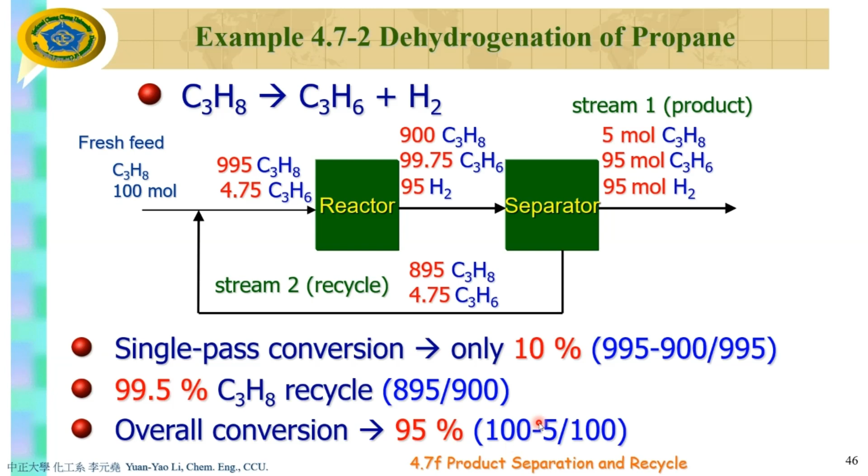About 99.5% recycles back to this reactor—the reactant recycles back. So for the overall conversion, which is 100 and this one is 95—100 minus 5, so overall conversion is about 95%. So it's good. This is one purpose for the recycle stream.

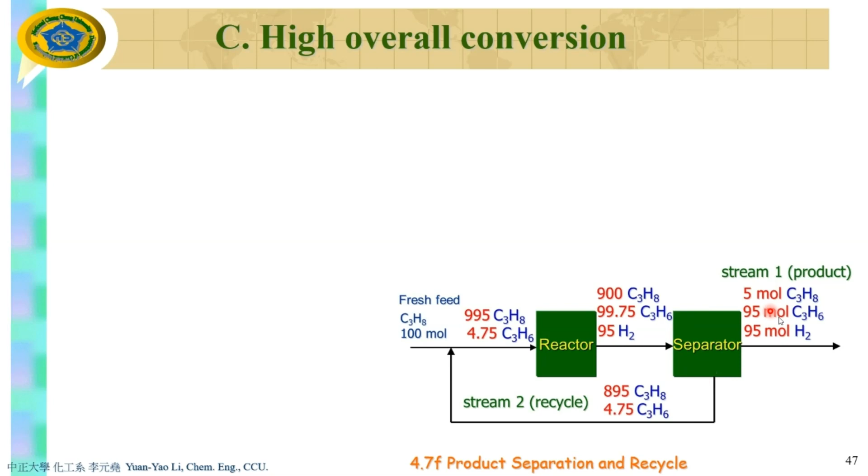So in order to have a high overall conversion, you have two methods. Method one is you have a very good reactor, so you don't need this separator. Method two is that if you don't have a good reactor, you need to have a separator in order to have a good overall conversion rate. This is very important.

We talked about that last week. Today we want to introduce another new topic, which is purging—we call it the purging stream. Let me make an example using the same setup as last week: this is a reactor, this is a separator, you have a fresh feed here, a recycle stream, a chemical reaction, and then you have a purging stream here.

You might wonder why, when things come out from the separator—this is the product stream, this is the recycle stream—we want one stream split out from the recycle stream, which is the purging stream. Why do we need to do that? This is the reason.

Assume you have a chemical reaction that reacts with oxygen. Once you have something react with oxygen, normally you don't put pure oxygen in—why? Because it costs money. So normally you put air in, because air has about 21% oxygen... it's free, so you just pump air into the reactor.

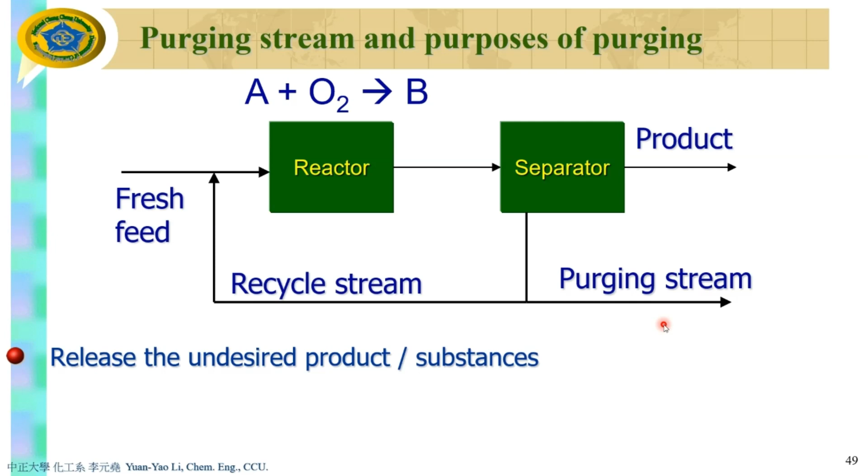This is the reason why we need a purging stream. It releases the undesired products or substances away from the system. If there is a non-reacted material in the process, purge is necessary. Otherwise, the material will accumulate in the process until shutdown. Shutdown means what? This reactor explodes, or separator explodes, from too much pressure, too much substance.

I will give you an example very soon. I just want you to know this is the purpose of purging.

So if you want to do mass balance using this system, if you have a stream from the separator and this kind of splitting point - split point means what, I hope you remember - the ratio of this substance will be the same, but different amount, of course. Or sometimes it can be the same amount. It depends.

The key is that the fraction of the substance in this stream will be the same fraction of the substance in this stream. So this is one point, split point, and this is the mixing point. As you remember last week, we introduced the mixing point to you here.

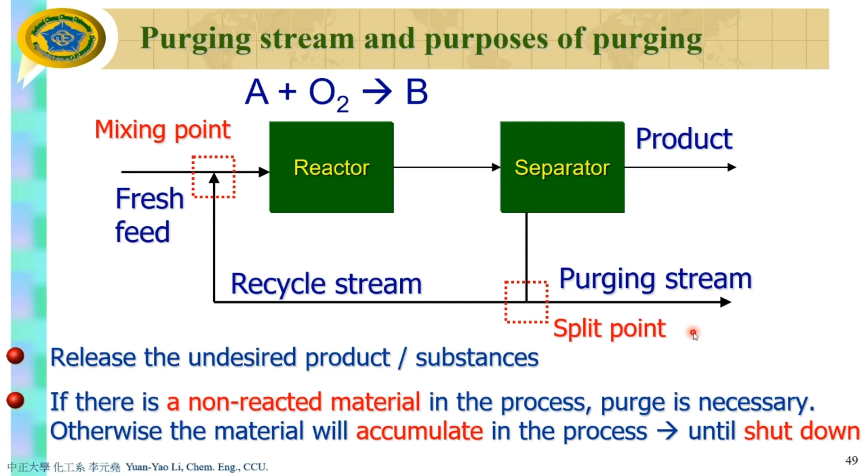Example figure 4.7-2 shows one reaction, where we want to make the product C2H4O from C2H4 plus oxygen. As you know, we don't really want to introduce pure oxygen into this reactor, we want to introduce air instead. So you have some portions, or sometimes we don't want this reaction to be so fast.

So we introduce some kind of inert gas, to dilute the concentration of oxygen. In that case, we don't have a very fast reaction. This is the purpose of the inert gas - in this case, it's nitrogen.

This is one example telling you that we need to introduce nitrogen into these reactors, and nitrogen doesn't do anything here - I should say it doesn't do anything with the reaction, but it does have the purpose of diluting the concentration of oxygen, or slowing down the chemical reaction, for example. So the nitrogen will go through the reactor without doing anything, and then it will go through a separator.

If the product doesn't need nitrogen - for example, this separator is a gas-liquid separator - all the gas will go through this way, and all the liquid will go through this way. In that case, nitrogen will go through this way. However, if you don't have a purging stream, the nitrogen will be stuck in a closed loop in this cycle, and you will have trouble. That's why you need a purging stream.

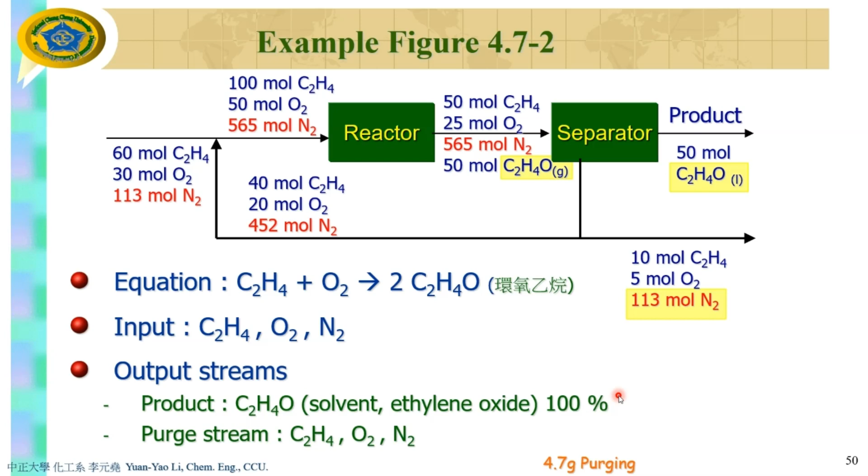And you have nitrogen here. So this is one of the examples.

Now let's go to page 133, example 4.7-3. This is an important example, and it is very likely this question will be in your final exam paper. So I want you to work with me so you can have a good score in your final exam.

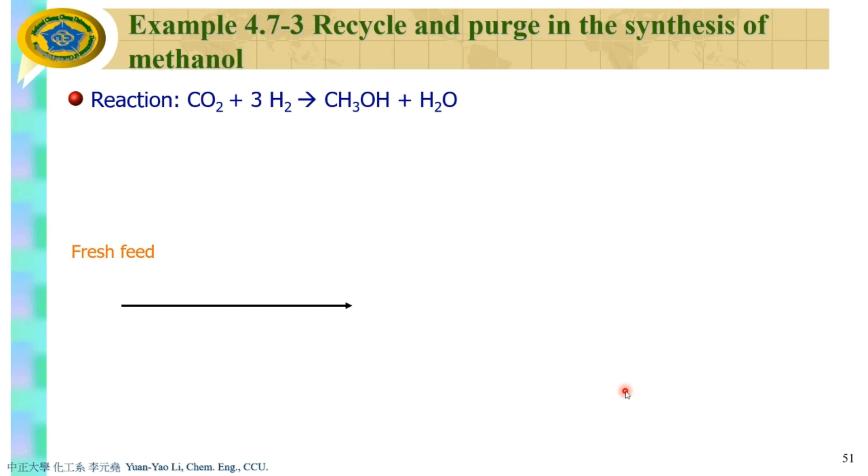Okay, so please work with me on the slide here. So we have fresh feed, and then what? And then we have hydrogen, carbon dioxide, and some inert gas, which is 0.004, right? 0.004. Okay, so this is what we know. And then this one going to the reactor. Okay, this one going to the reactor.

And then the reactor -- after the reactor, we have a separator, which is a condenser. So the condenser condenses something away, out in the liquid form. And some of them -- so which is, we have water and methanol. So these two will be condensed because water and methanol are easy to condense.

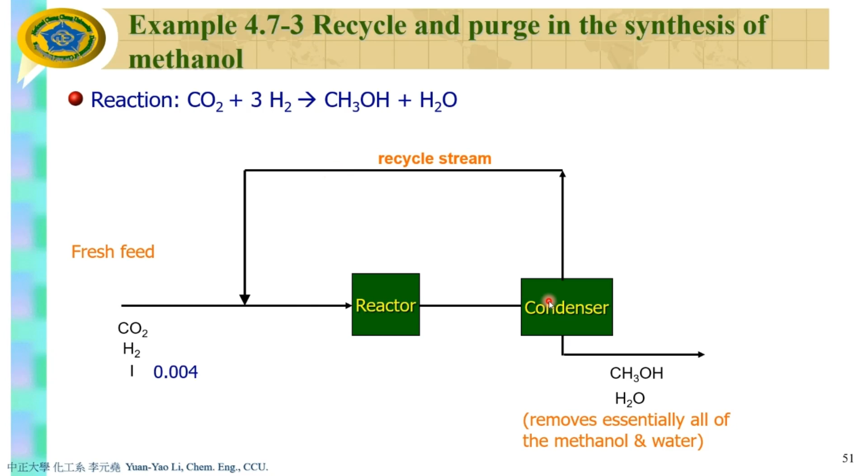And then you recycle the products, reactants, non-reactants back here. They are what? So this is called the recycle stream. And in order not to build up the reactants in the cycle, we have a purging stream, right? So this is a mixing point, and we will have CO2, H2, and inert gas, the same as CO2, H2, and inert gas. And then we have a purging stream.

I think in your final exam, I don't think I will give you this flow chart. So you need to draw the flow chart by yourself, I think, according to the description of the question. Okay, so basically the flow chart will be exactly the same. It's just that I will give you different numbers.

Right, so this is the split point. So you know that split point and the mixing point here. So again, if you come out with the carbon dioxide, hydrogen, and inert gas, of course in the recycle stream you will have carbon dioxide, hydrogen, inert gas, and in the purging stream, of course, you will have carbon dioxide, hydrogen, and inert gas, right?

Okay, so now it's important. Let's go to the text, the third paragraph. Start with the feed to the reactor. Okay, the feed to the reactor, not the fresh feed to the process. This stream on the slide -- this stream is the fresh feed to the process, but this stream is the feed to the reactor.

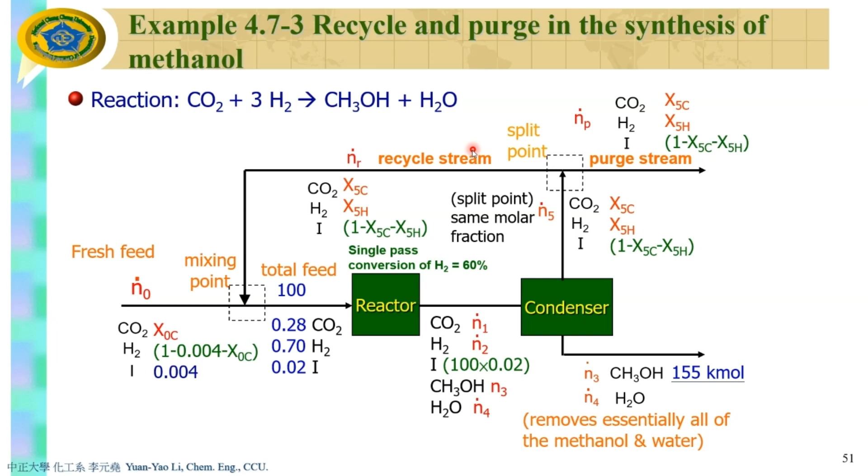Okay, so this is, so we complete all the unknowns in the flow chart. Okay, so now let's start to work from the basis, and then DOF, and then do the calculation. So in page 139, as a general rule, a combined feed to the reactors is a convenient stream to use as a basis of calculation for recycle problems. So remember this key point, okay? So when the stream composition is known, we will therefore temporarily ignore the specified methanol production rate, which is 155 kmol per hour, okay? Balance the flow chart for the assumed basis, which is what? 100 kilomoles per hour, okay, and then scale. This is important, after that you do the scaling. Scale the process to the required extent. Right, so let's do it.

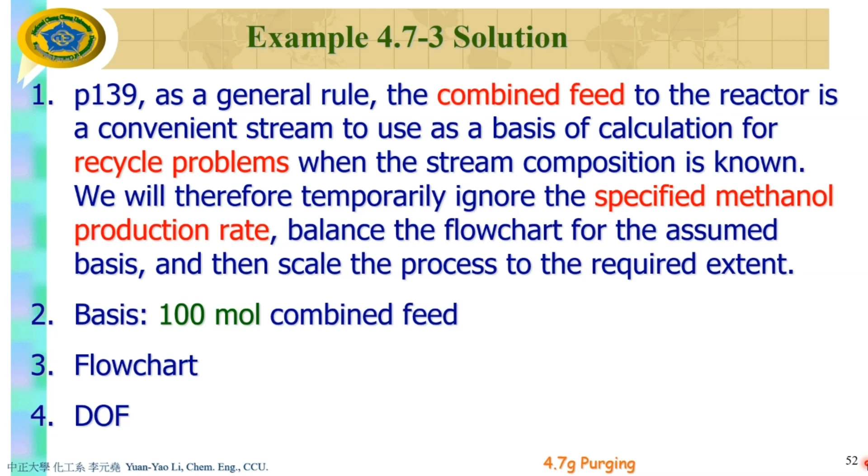Second, basis 100 kilomoles, or you can say 100 moles as you like. Combined feed. Third, flow chart. Okay, you finish the flow chart, and fourth, you do the DOF. Okay, so how can we do the DOF?

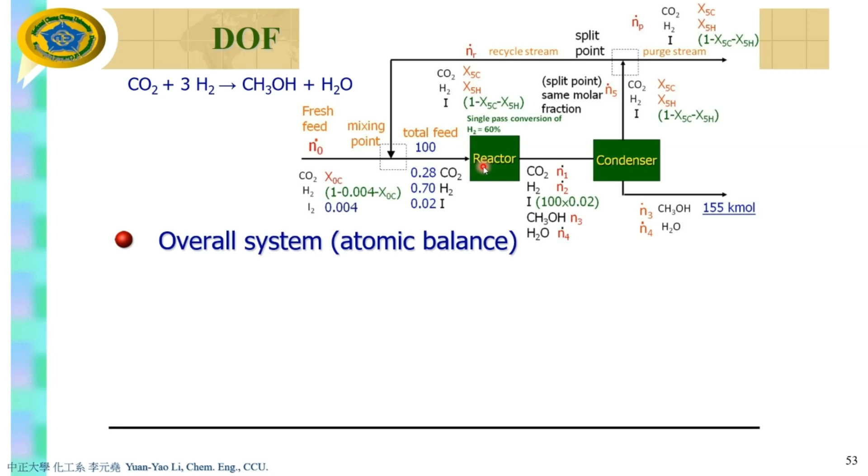First is overall system, overall unit system, right? So overall unit system, if we do the overall unit system here, then we need to conduct with what? We need to conduct with atomic balances. Why? Because the overall unit system involves chemical reaction. So as we know from last week, we suggest you use atomic balances, which is easier for you to do the calculation. But before you do this, let's do the DOF. So there are four terms in the DOF for the atomic balances. The first term is what? Unknown, right?

The second term, I hope you remember, independent atomic species balance. How many atomic species are involved in this reaction? The third one is molecular balances on independent non-reactive species. So if this system involves inert gas, you need to do the molecular species balance, especially for the inert gas. Okay, and then fourth, other equations relating unknown variables. Okay, like remember that, like single pass conversion specification, physical laws, and physical constraints.

Okay, so let's do it in the overall system. Please tell me how many inputs and how many outputs in the overall system. Anybody want to tell me? I want to give you 0.5 point. One input, two outputs, right? Okay, thank you, I'm happy somebody raised their hand so fast.

So this is a little bit more, right? We have one input, two outputs, okay, so I'm sure you know that. How many unknowns here? I'm sorry, you already know the answer, so I don't want to give you points. If you block here, one input, two outputs, so you need to start to count how many unknowns. 1, 2, 3, 4, 5, 6, 7. There are 7 unknowns.

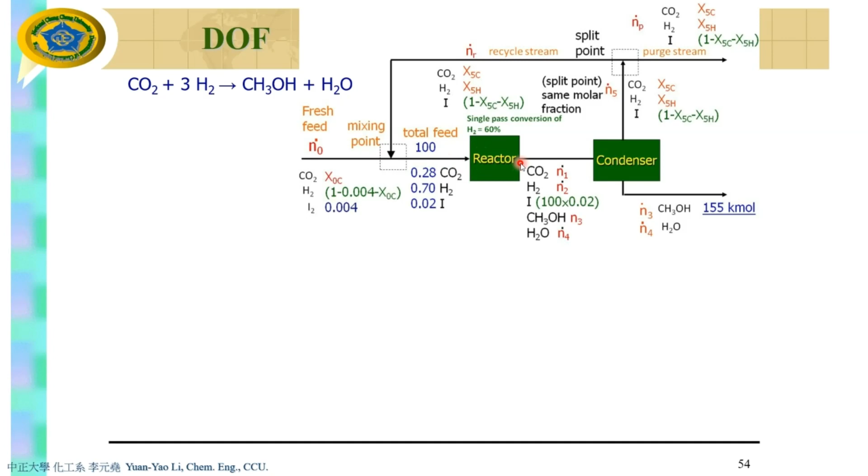So then where is the specification? This is the specification between the input and output. So if I were you, I would choose this reactor first because it has less unknowns and more specifications.

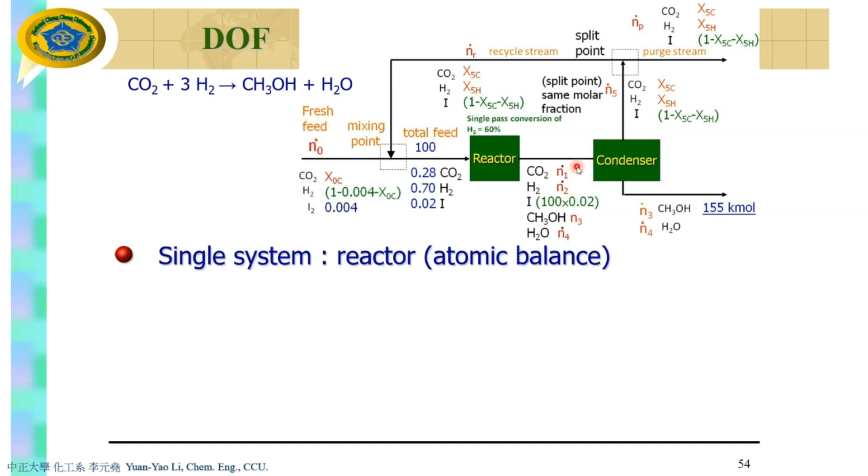And again, we need to do atomic species balance. So again, let's write it down here. So you have one input and one output, easier. So how many unknowns here? 1, 2, 3, 4. We have 4 unknowns.

And then how many independent atomic species balances? Again, carbon, oxygen, and hydrogen, right? So we have 3.

And do we have molecular species balance? 1, right? But no, actually I use a bracket here because you already used these unknowns, there's no unknown. You don't make a red mark here because you already use this specification. Sorry, you already used these balances already. So ignore this one.

Okay, and then what's the other equation relating unknown variables? 1, right, which is the single pass conversion. And you need to remember the definition of the single pass conversion. Okay, so 4 minus 3 minus 1 equal to 0, so that will be 0. So you can achieve this one, this one, this one, and this one, N1 to N4.

Again, I don't want to waste your time doing this kind of easy calculation, you do it by yourself. Okay, so because we use the single pass conversion for the mass balance, I'm sorry, let me restart. We use the reactor for this mass balance, so we get N1, N2, N3, N4, right?

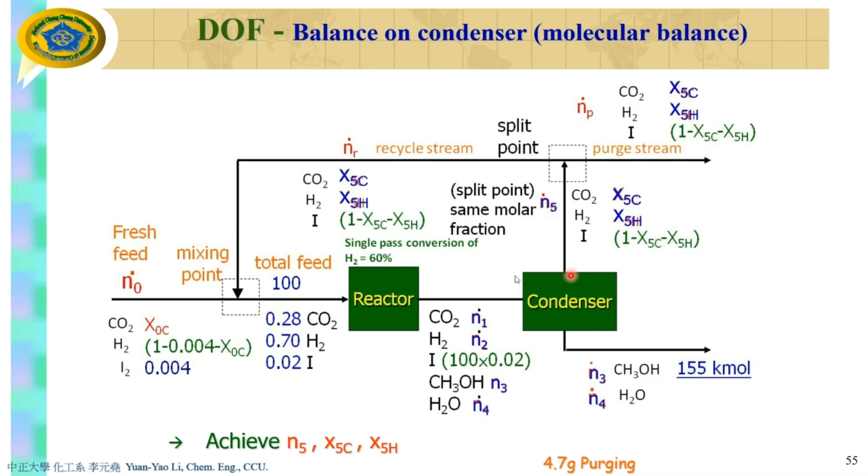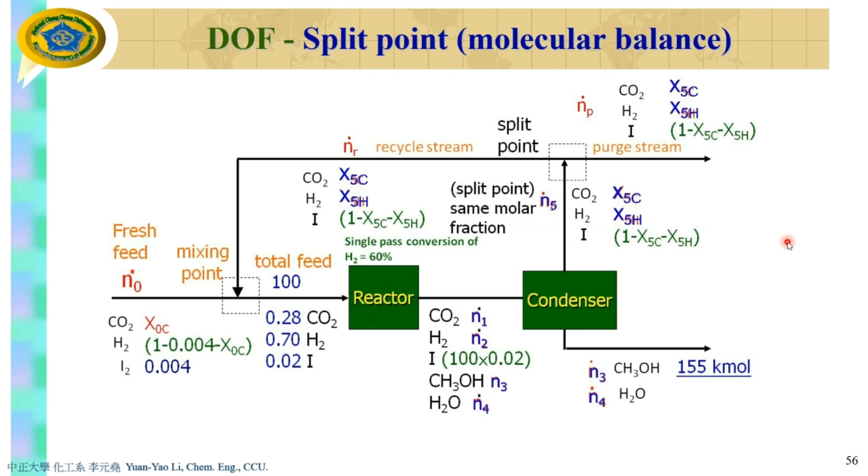So you have to go back to this one. Once you do the balance on a condenser, you solve the problem and get some answers. After that, you move back to this, to the splitting point, molecular balances. And ratio of species is the same, so it's not independent. So forget about this point and move to the mixing point.

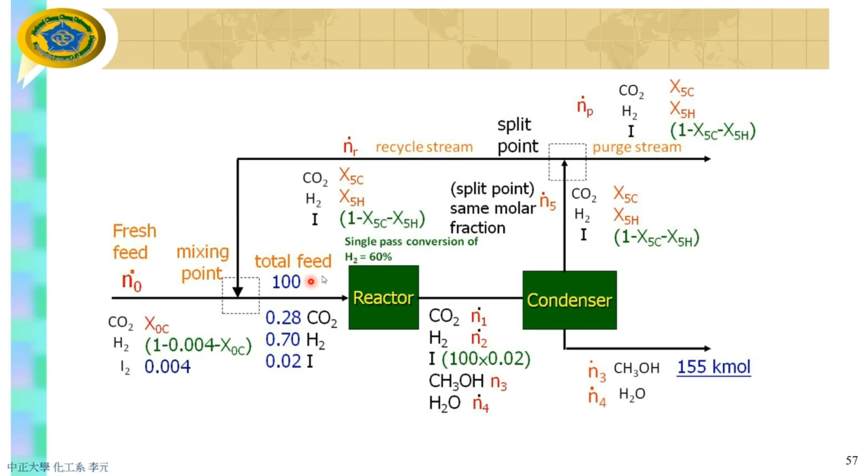Okay, so let's revise this again. Once we get the mass balance for the reactor, we get N1 to N4, right? We got N1 to N4. And because this is a condenser, so since condensed will be 100%, N3 will be the same, N4 will be the same here. And then after that, we do the condenser, we got an answer of N5, X5C, X5H.

And because this is a splitting point, the fraction will be the same, right? For the purging stream and recycle stream. So X5C and X5H will be the same according to this stream. And this one is not independent, N sub R and N sub P is not independent.

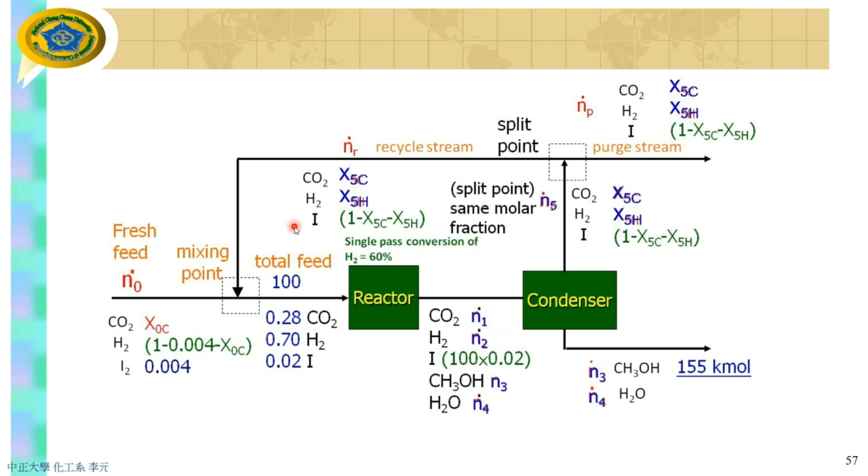So let's move to the mixing point. So mixing point, how many input? 2 input, 1 output, right? How many unknowns here? 1, 2, 3. There are 3 unknowns. So 3 unknowns, easy, right? So you can get 3 unknowns from 3 molecular species balances: carbon dioxide, hydrogen, and inert gas. Bingo, you can solve this problem.

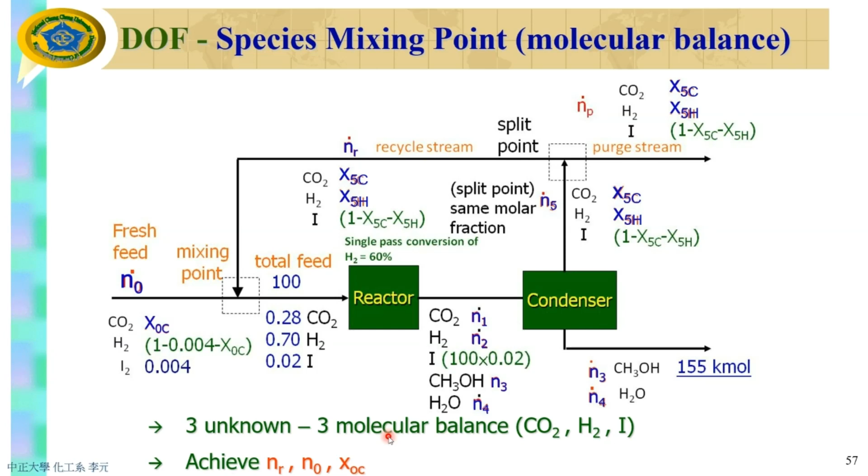NR, N0, and XOC. Okay, so with this way of doing the job, I hope I worked through this with you, and I hope you understand. In your final exam, you can do this calculation easier. Right, and then back to the splitting point, you finally get this number.

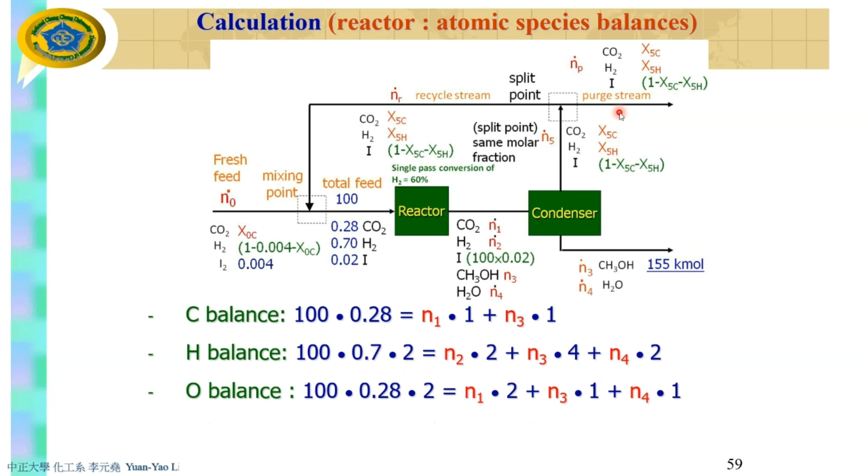So now this is the way of doing the calculation, and I think please read this by yourself. You can practice this. Okay? And you can get the answers.

Right, so the final part is called flow chart scaling. As I just told you, we forget about 155 first and we have a basis in this stream. So once we get N3, there's a ratio of N3 to the 155, so you can scale up or scale down. That's what we learned before the midterm exam, right? So if you know the ratio, you can change.

If this ratio is about 10 times, so it's just times 10 for N4, N1, N3, and then N5 here. Of course, you don't change the ratio here, okay? You just scale up or scale down.

So basis is 100 kilomoles combined, okay? And we got N3 is what? N3 is 14 kilomole. And then the text tells us that N3 is 155. So you just divide 155 by 14, that will be 11.1. So that means you have to multiply all the numbers by 11.1 from the original number. Okay?

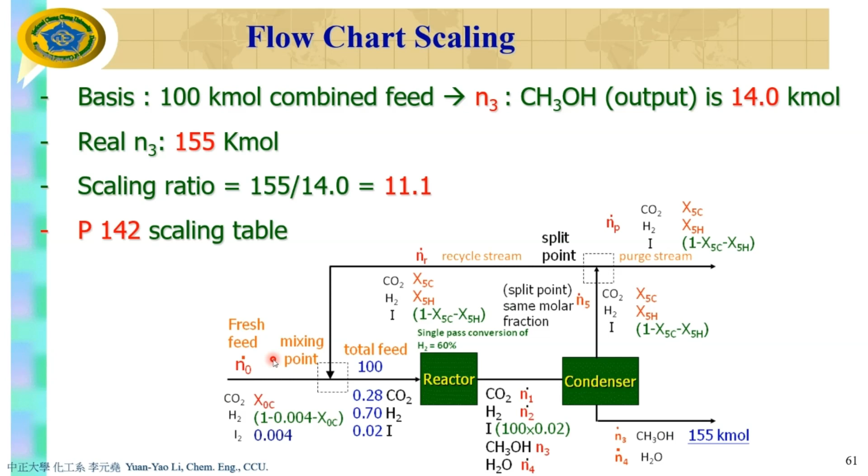Okay, and you got all the answers. So on page 142, that's the scaling table. I'm sure you can have a calculator and do it quick. Right, okay.

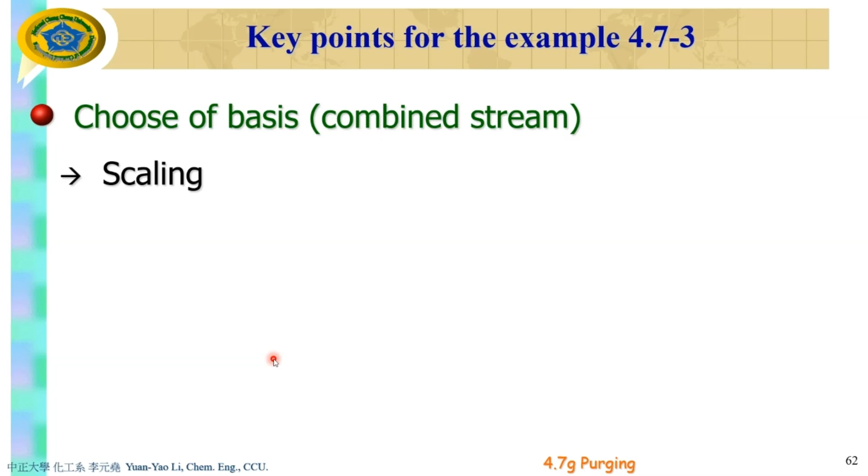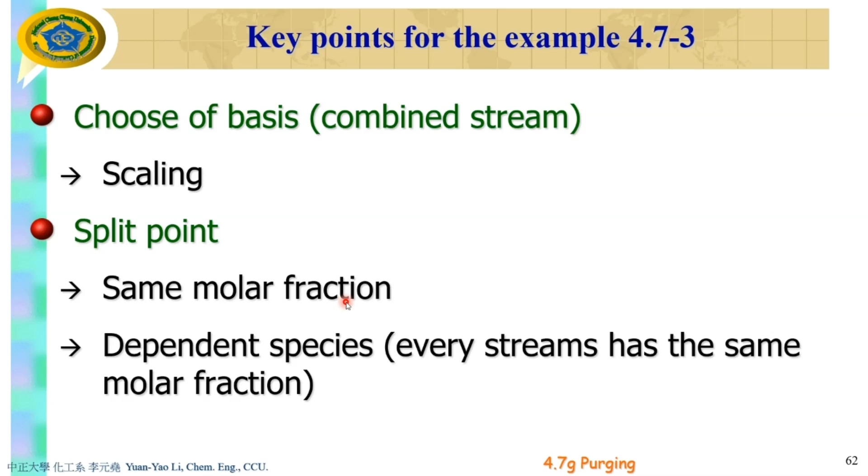So key points for example 4.7-3, that's why you need to remember. First, choose a basis, forget about 155. And splitting point is the same molar ratio. You need to remember this, otherwise you cannot get the answer. And also the condenser, remember the condenser. Right, okay, so this is coming to the end.

So this is one very important example in industry. You know, methane is in gas form, it's very expensive to ship. You don't want to ship the gas from the Middle East to Taiwan. It's very expensive. Okay, it's the same as you don't want to ship water, it's very expensive. You can have water in Taiwan. Why would you need to ship water from United States to Taiwan?

And also methane is gas, so normally you don't want to ship gas because the density is too low. You want to ship something with very high density. So gas is expensive to ship. It's usually converted into carbon monoxide and hydrogen and then liquefied.

So you change the methane to carbon monoxide and hydrogen and then make it become liquefied. Okay, and what kind of chemical do we want to have? Benzene. So a promising alternative is conversion to benzene and hydrogen with the catalyst.

Catalyst is a kind of chemical which doesn't involve in a chemical reaction, but it helps the chemical reaction. It reduces the activation energy, so it can make the chemical reaction happen easier. So methane, this is called methane dehydrogenation.

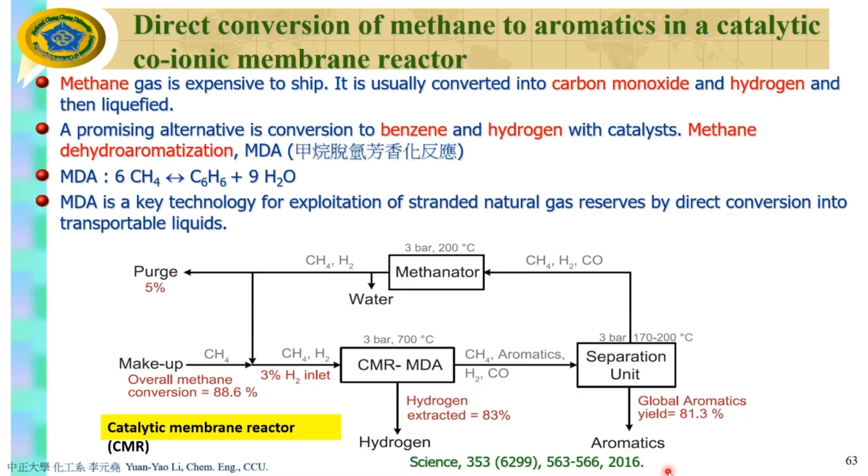And this is a paper from Science, in 2016. You know, if you can publish a paper in Nature and Science, you are famous. Very important journal. Right, so we finished this chapter, we finished this section.

4.8 is what we call combustion reaction. You already learned combustion reaction in the previous section, because it just involves oxygen, right? So the combustion reaction is what?

It's a rapid reaction with a fuel. The fuel can be a liquid, it can be gas, it can be solid, okay? It's perhaps more important than any other class of industrial chemical reactions. It's very, very important for combustion. You use combustion every day.

Despite the fact that the combustion products, carbon dioxide, carbon monoxide, water, and sulfur dioxide, are worth much less than the fuels burned to obtain them. Because, if you use the combustion process, the product is like this, which is not good at all.

Then why do you need this kind of reaction? What you need is energy, right? Tremendous energy. So once you do the combustion, you get energy, which is thermal energy. So the significance of these reactions lies in the tremendous quantities of energy they release.

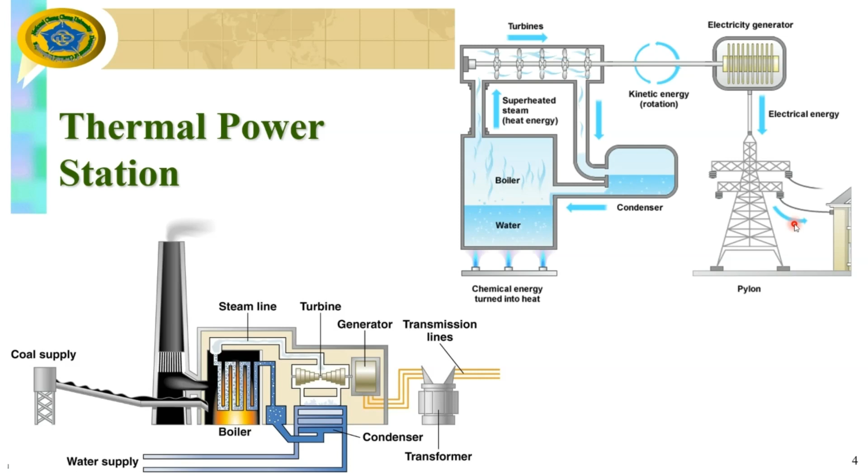Chemical engineers and also mechanical engineers are involved. In a thermal power station, fuel such as coal, oil, or gas is burned in a furnace to produce heat. The heat is used to change water into steam in the boiler. Steam drives the turbine, converting heat to kinetic energy, which drives the generator to produce electricity, converting kinetic to electrical energy.

So basically, I want to remind you that this is a very important process: chemical energy, thermal energy, convert to kinetic energy, and then electrical energy.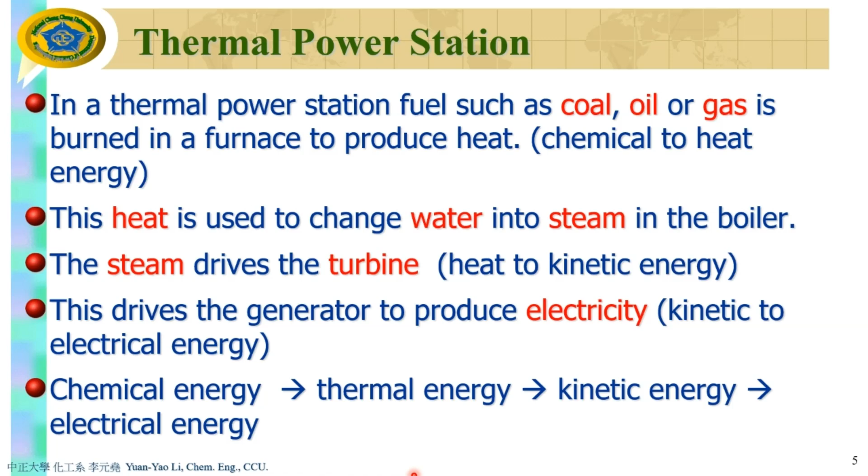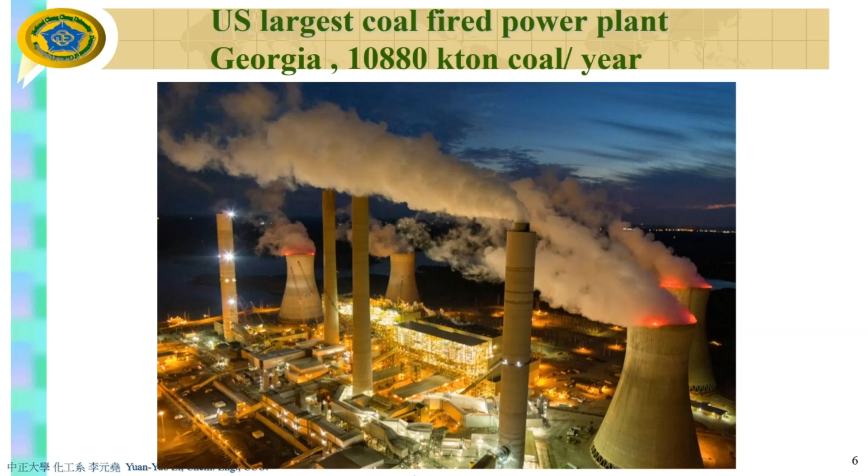This is one of the largest coal-fired power stations in the United States, in Georgia. So this is a power plant.

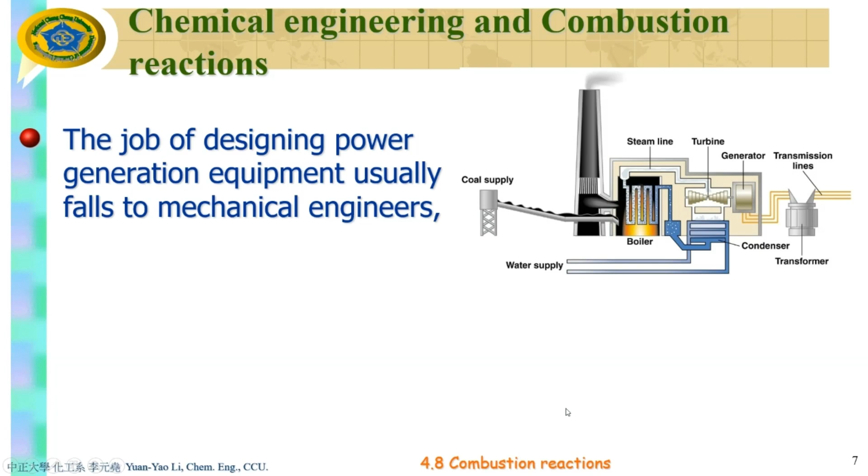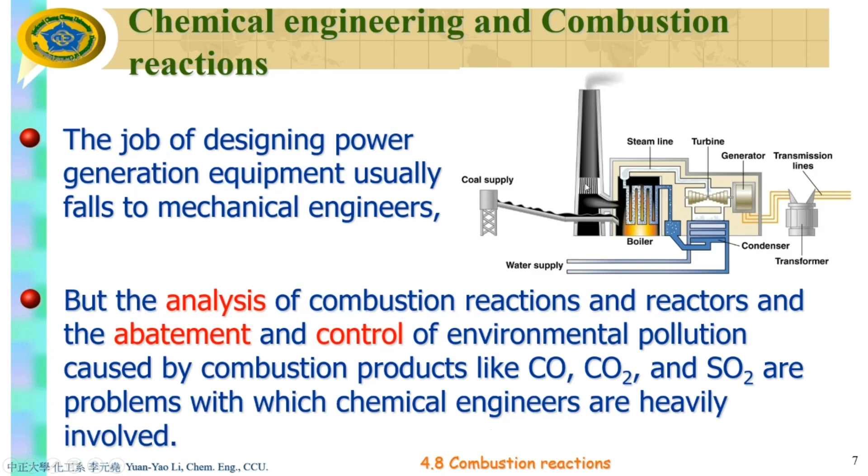The job of designing power generation equipment usually falls to mechanical engineers. So how to design this is the job for mechanical engineers. But what happens with chemical engineering? The analysis of the combustion reaction, the reactors, abatement, and control of environmental pollutions caused by combustion products like carbon dioxide, carbon monoxide, sulfur oxide is a problem which chemical engineers are heavily involved in. So the chemical engineer is kind of a process engineer—you need to go through all the process and try to reduce the trouble and increase the efficiency.

I will skip this section because for the mass balance, this concept will be all the same. The important thing I want to tell you is what I just covered from page 1 to page 7, so I will skip this.

Please read this section by yourself. And this is one of the important things.

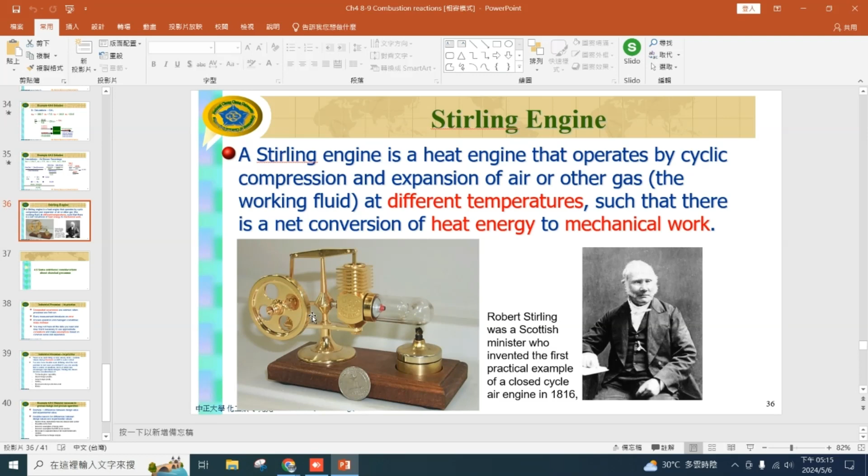It's called a Stirling engine, what we call 外燃机. You've heard about 内燃机, right? This is from the very beginning. 外燃机 transfers chemical energy to thermal energy. Thermal energy changes to what? Mechanical energy, which makes things move. So this is the Stirling engine, a very important energy concept—you can use this to make a car move.

So that's it for chapter 4.

I want to talk a little bit about chapter 5 today. We finished the most important chapter, chapter 4. If you know how to do mass balances using the concept I just told you, you can apply the same concept to energy balance and momentum balance—well, forget about momentum balance. You can use the same concept for energy balance, which is in chapter 7.

But what happens in chapter 5 and chapter 6? That's something to do with chemical engineering. We want to talk about liquid and gas—we don't talk about solid that much—and we want to talk about specification. As knowledge for chemical engineers, you need basic knowledge like vapor pressure. What's the vapor pressure of water at 25 Celsius, and how do you get it? This kind of specification.

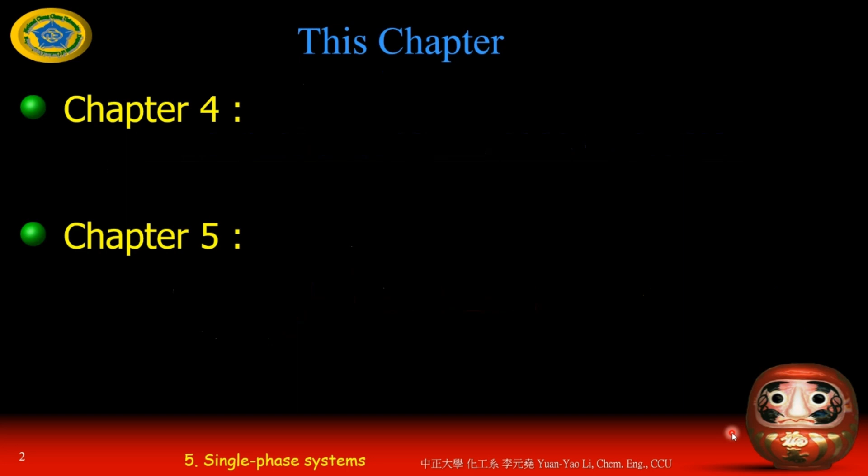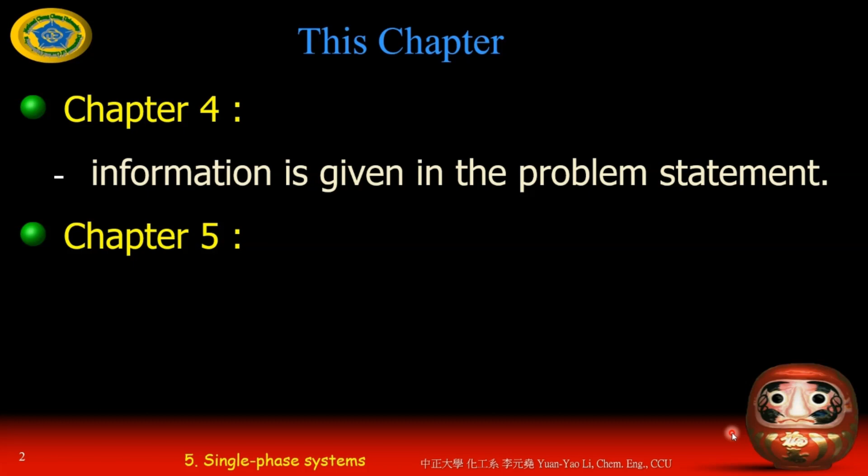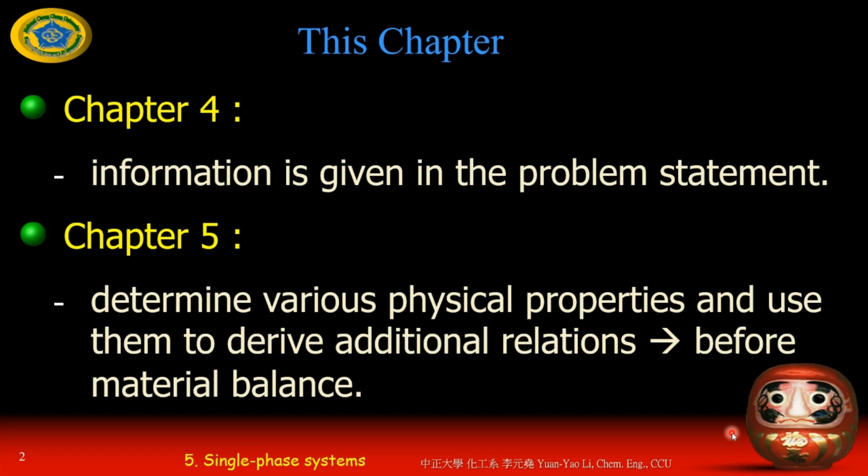Now let's talk about this very easy part. Let's start with the single phase first, then chapter 6 will talk about two phases, liquid and gas. In chapter 4, information was given in a problem statement—I give you the vapor pressure, I give you the concentration. But in chapter 5, you need to determine various physical properties and use them to derive additional relations before the material balances. That means you need to know basic knowledge about specification, and then you can solve the problem using mass balances.

Okay, so this is what we start to work with. You have the specification and determine the variables. Variables such as what? Density—what's the density of the gas at what pressure or temperature? What's the vapor pressure? And what is the solubility?

Solubility—you know the solubility of oxygen in water. What's the solubility? You also need to know this. And the heat capacities, this will be in chapter 7. And how to determine them, how to make this determination.

How to determine vapor pressure, for example. First of all, check. As a chemical engineer, the important thing is to check the number, find the books, and get the answer. That was me when I was a student—I need to find books, I need to go to the library. And now you don't, you just Google it, right?

Google it. But you might get many different answers, and according to your professional judgment, you need to know which one is the best, which one is the right answer. So one very important handbook is Perry's Chemical Engineers' Handbook. This was like a Bible for me when I was a student. You have everything in the book.

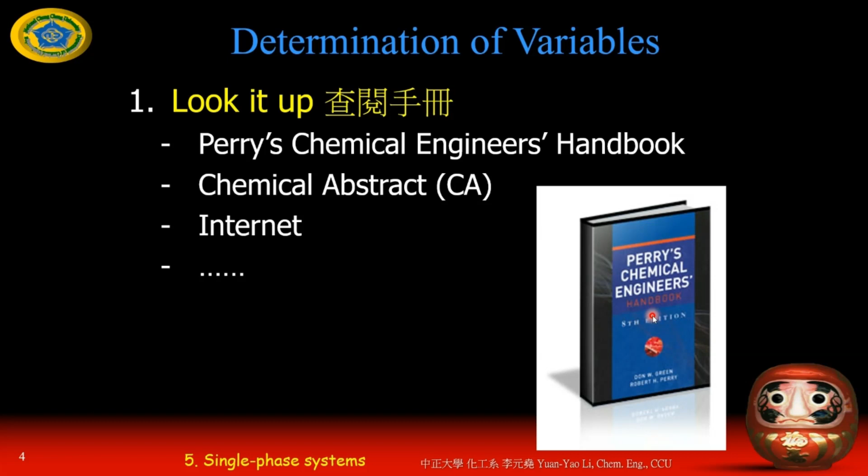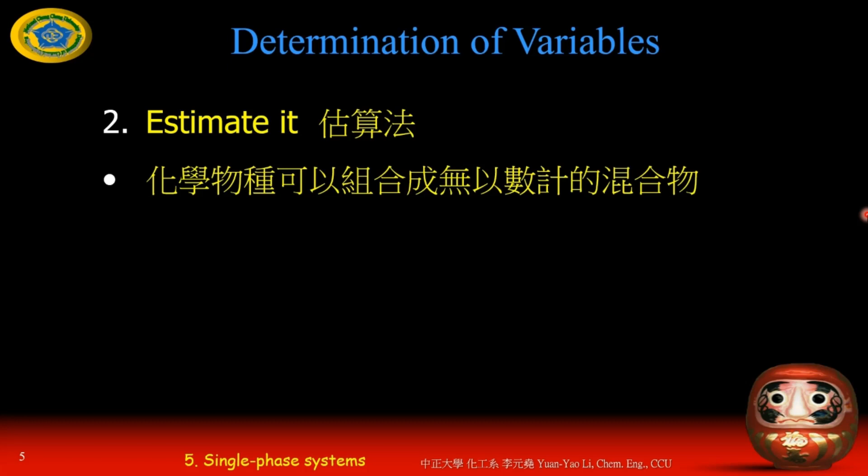Again, now you go to the internet, you Google it, you can find the answer. The other one is Chemical Abstracts, we use CA. The second method is estimate it—just know how to estimate. If you have a single pure component substance, that will be easier. But if you have a mixture, then that won't be so easy.

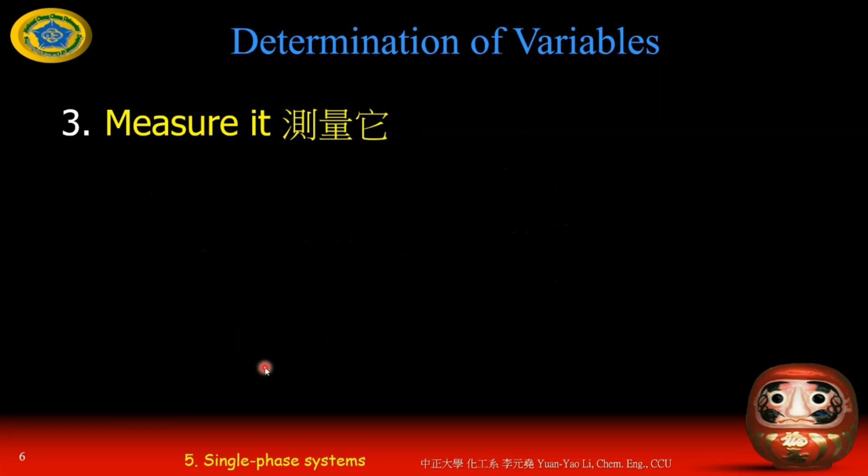Then what happens? You might be able to find a chart, a relationship between the gas and liquid. The third one is measure it—you just do the experiment and find out. So if there is no literature available, you just do the experiment.

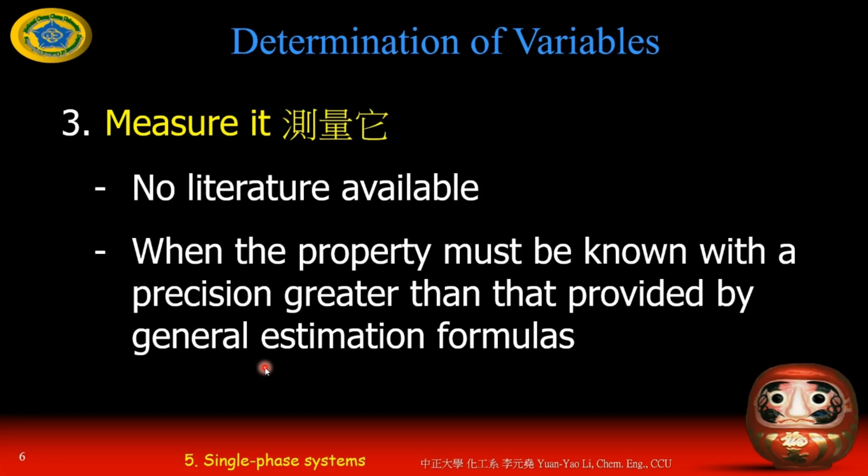So this chapter is easy—we just want to tell you how to determine the density of gas and liquid. We don't talk about solid because that's called material science; I'll talk about this when you are in second year. So how to determine the density of gas and liquid of the mixture. We use M as mass, N as mole.

Section 5.1 is density of solid and liquid, section 5.2 is the density of the ideal gas, and of course section 5.3 will be density of non-ideal gas.

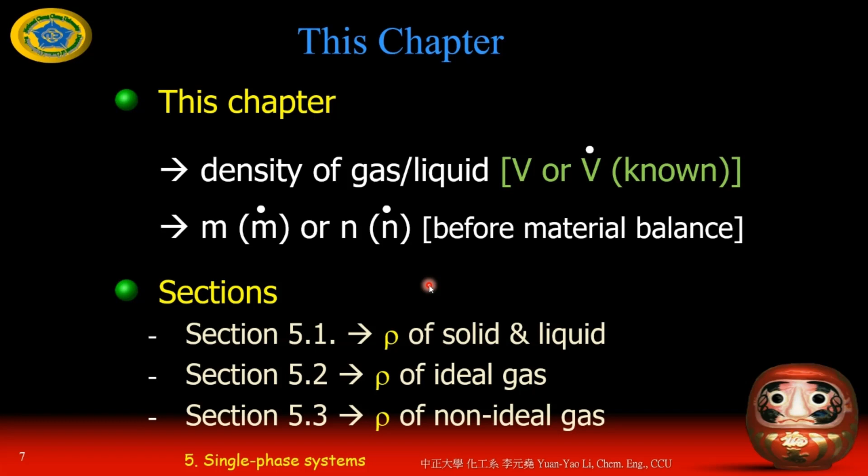The liquid and solid density—I'm sure you know density is related to temperature. Is density a function of temperature and pressure? Yes, it is—it depends on whether you are talking about solid, liquid, or gas. So the density versus temperature: if temperature increases, volume increases. If volume increases, density decreases. So temperature increase, density will decrease.

You can think of solid, you can think of the case of water. If we increase the temperature from below zero, that will be ice. And then if we increase the temperature above zero, that becomes water. From ice to water, the density of water will be lower. Well, actually, let's not use water as an example because water has hydrogen bonds, so density will be a little bit different.

Let's use carbon dioxide—dry ice. Have you heard about dry ice? If temperature is below a certain point, carbon dioxide will be dry ice, and the density will be very high. But if you increase the temperature, it becomes carbon dioxide liquid, which is a very small gap, and then density will decrease. Then what happens? If you increase the temperature further, carbon dioxide will become gas, and the density will become very low.

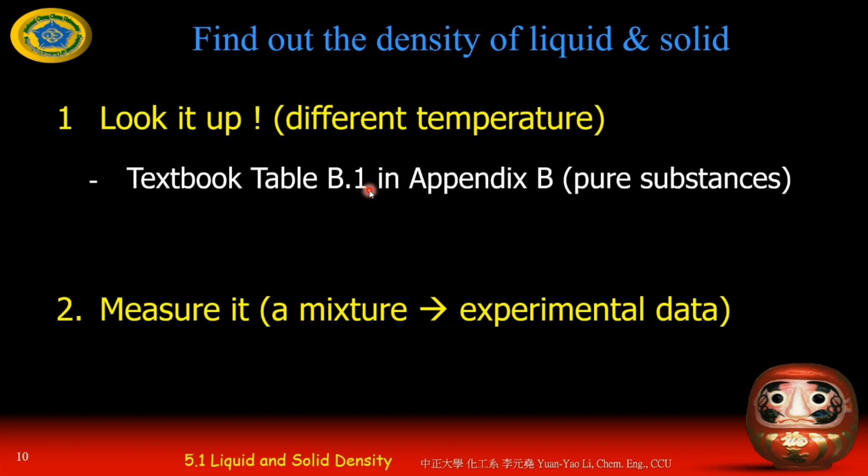How do you find out the density of liquid and solid? Easy—again, three methods. First, look it up. You find the books, at different temperatures. If you want to find some substance, you can get the textbook, table B1 in Appendix B, and get it. Again, the Perry's Chemical Engineers' Handbook, you can get an answer there.

Or what you measure—you measure the density.

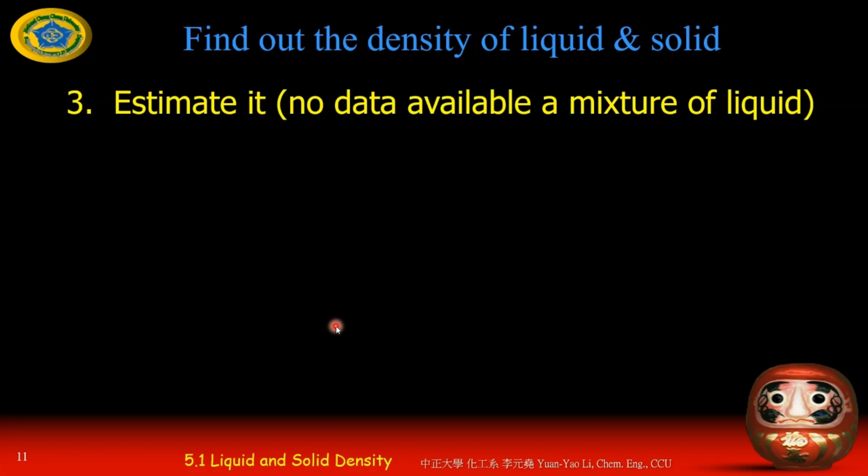Okay, so how do you estimate the density if no data is available for a mixture of liquids? For example, a mixture of liquid, you cannot find it from the textbook because there are so many kinds of combinations. So that means you need to start working on how to estimate the density of the mixture substance.

So there are two methods. One is what we call volume additivity, 体积加成. Assume if we have only two substances, the volume values are called V1 and V2. And we understand V1 has a density rho 1 and V2 has a density rho 2. X1 and X2 are the fractions of these materials in this mixture.

So you have M here, the total mass. As you put these two together, if the volumes can be combined without any problem, V1 plus V2 becomes this. And as you move M here, you understand this becomes like a reciprocal of the density. This is called the reciprocal of the density, and it will equal X1 divided by rho 1 plus X2 divided by rho 2. So this is what we call volume additivity.

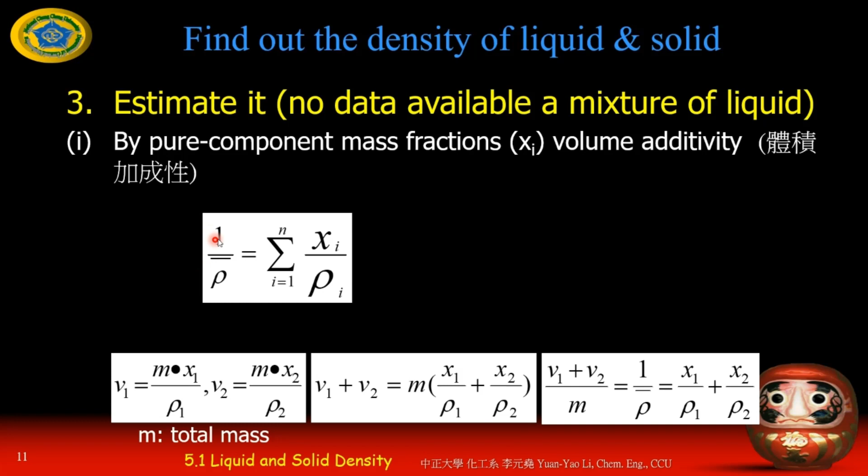But if you have 3, 4, or 5 substances, you put it together and make it a summation. The reciprocal of the average density becomes the summation of xi divided by rho i, where x is the mass fraction and rho is the density of species i. You don't need to remember this equation because it's easy. This is what we call volume additivity.

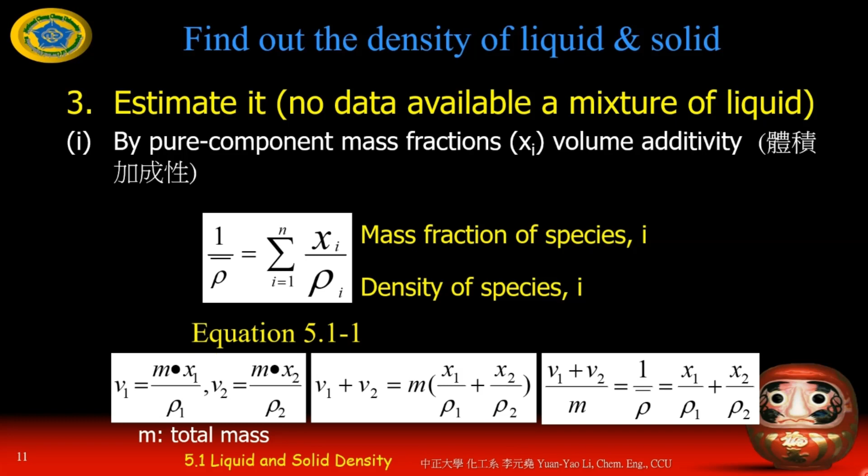This is equation 1, equation 5.1-1. And the other one is: for the pure component xi, you can get the density using mass fraction instead of volume additivity, which is easier.

You have learned this before. Rho bar means the average density of the mixture, which is the summation of xi times rho i. Xi here is the mass fraction. This is equation 5.1-2.

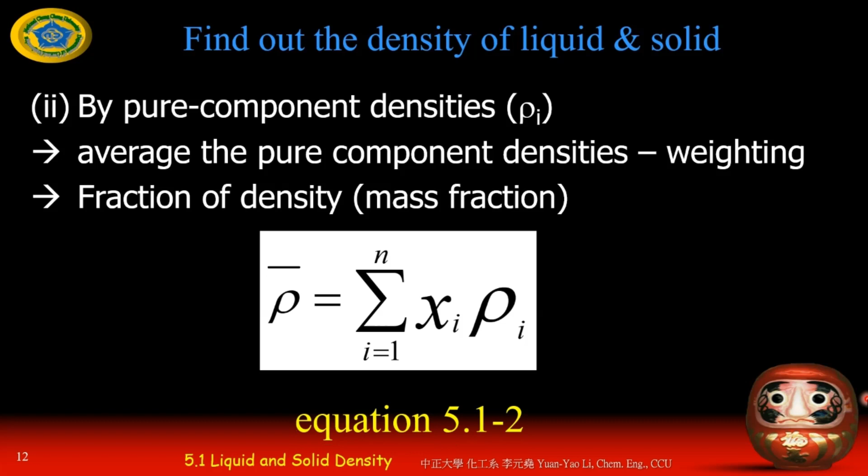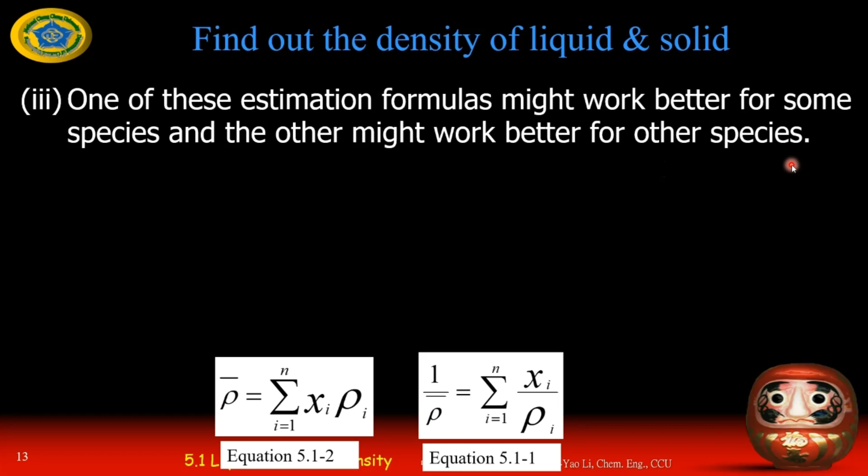So which one is better? Which one do you need to use, equation 1 or equation 2, to find the density of liquid and solid? There's no correct answer. Sometimes some species is suitable for equation 2, some mixtures are suitable for equation 1. One of these estimation formulas might work better for some species, and the other might work better for others. But there are some general rules.

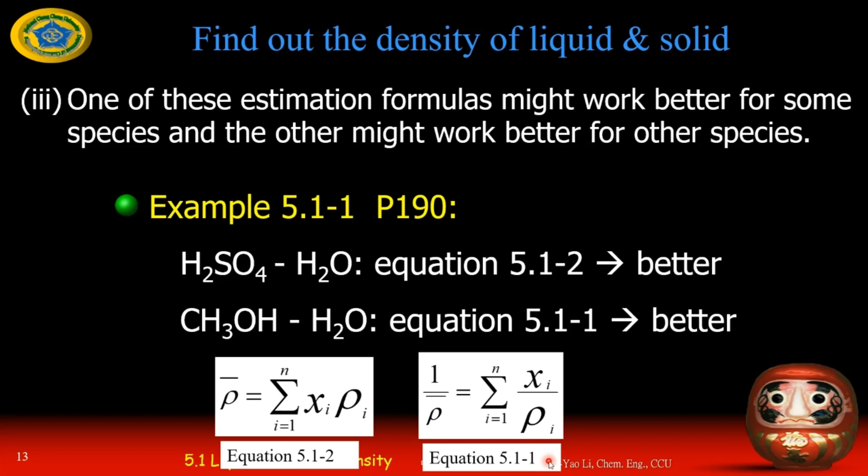This is one example. If we have a mixture of H2SO4 with water, equation 2 will be better. If you have methanol, CH3OH, together with water, equation 1 will be better. So there's no right answer. This is one of the examples showing that volume additivity is normally used for liquid species with similar molecular structure. If you have a similar molecular structure, the textbooks suggest using volume additivity.

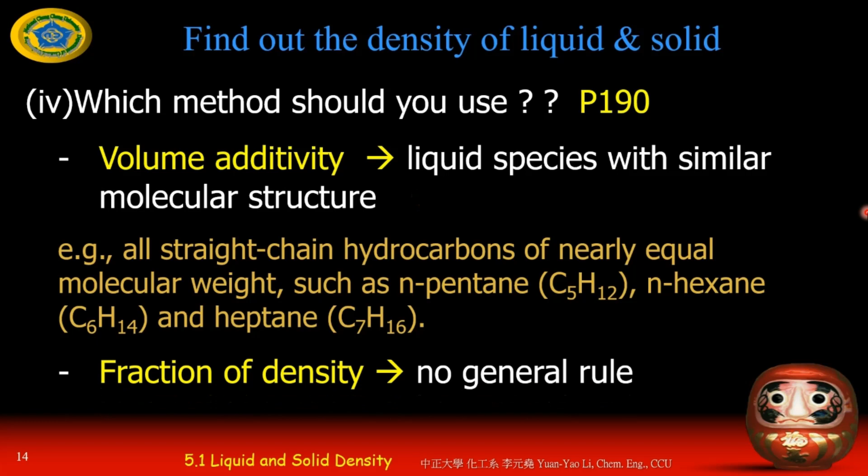For example, all straight chain hydrocarbons, like n-pentane, hexane, and heptane, you can use volume additivity for the mixture to understand the density. For the mass fraction density method, there's no general rule.

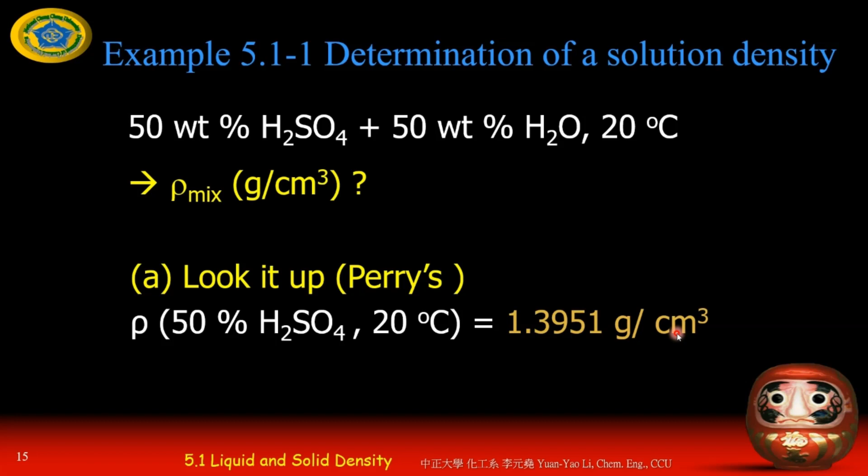So this is the example, determining the solution density. For 50 weight percent H2SO4 and 50 weight percent H2O at 20 Celsius, you want to know the density of this mixture. You can use two methods. First, check the book, the Perry's Chemical Engineers' Handbook. This is the correct answer because the Bible always tells you the truth, right? So you have 1.3951 grams per cubic centimeter. Okay, this is the answer.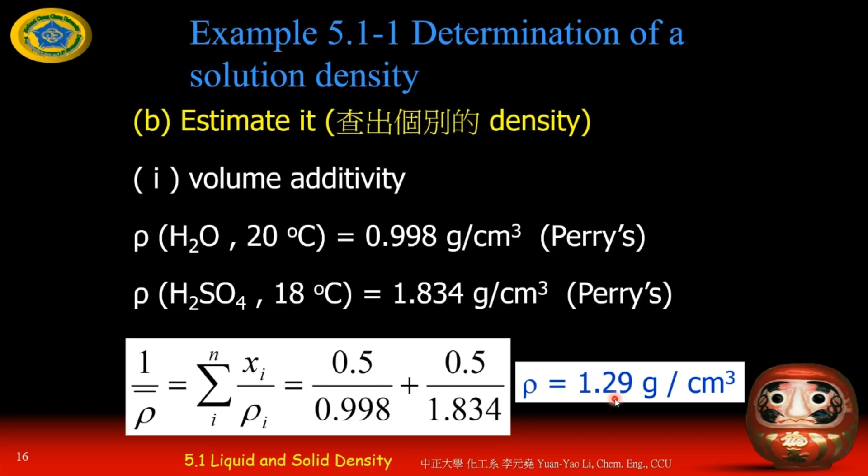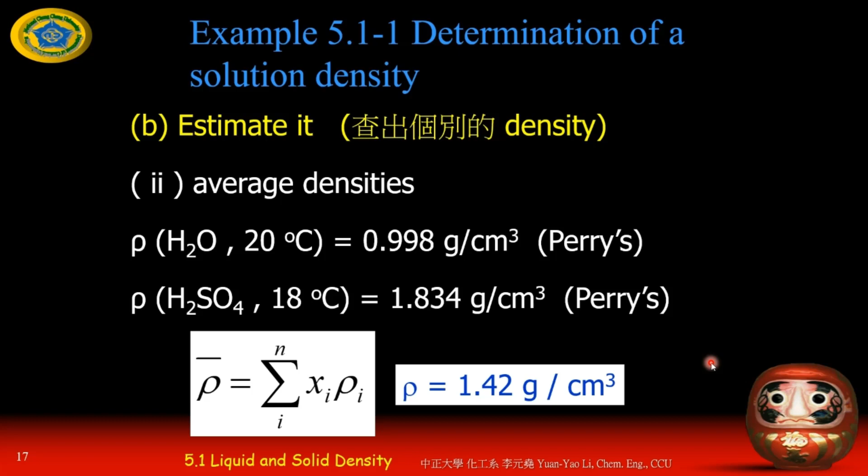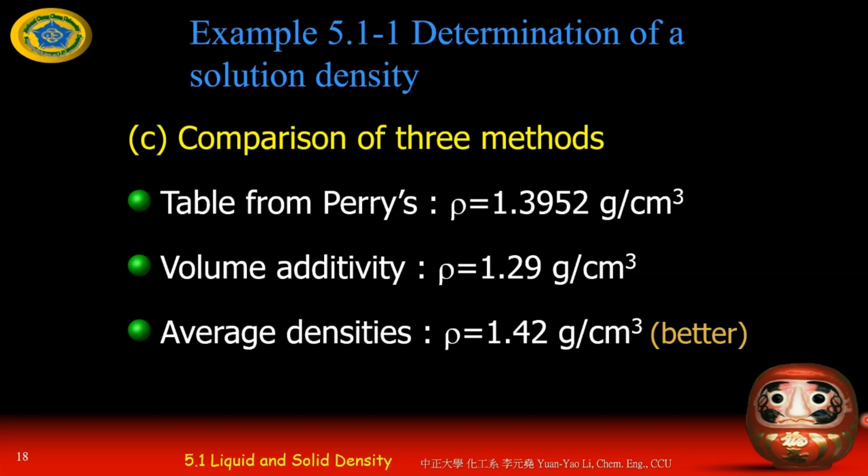But if you use the two equations to solve this, for volume additivity you get a density of 1.29 grams per cubic centimeter. But for the average density equation, you get 1.42 grams per cubic centimeter. So which one is closer to the true value from the textbook measurement? Volume additivity gives 1.29, and average density gives 1.42. Obviously this one is better, the average densities. But anyway, there's no exact rule, this is just an example.

Right, so since we're running out of time today, I think on Wednesday we are going to talk about ideal gases.